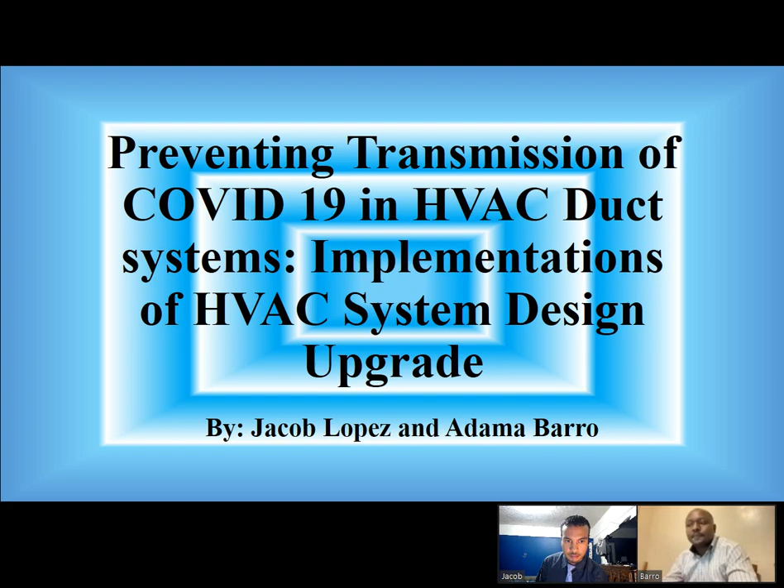Hello, everyone. As an introduction, as schools, government buildings, and commercial facilities of all sorts were shut down due to last year's COVID-19 pandemic, the urgency to focus on indoor air quality has been a priority to communities of all respects. In order for our research to be successful in finding a mitigation strategy for SARS-CoV-2 coronavirus, we first had to address the nature of how the virus may transmit through the air in public indoor spaces.

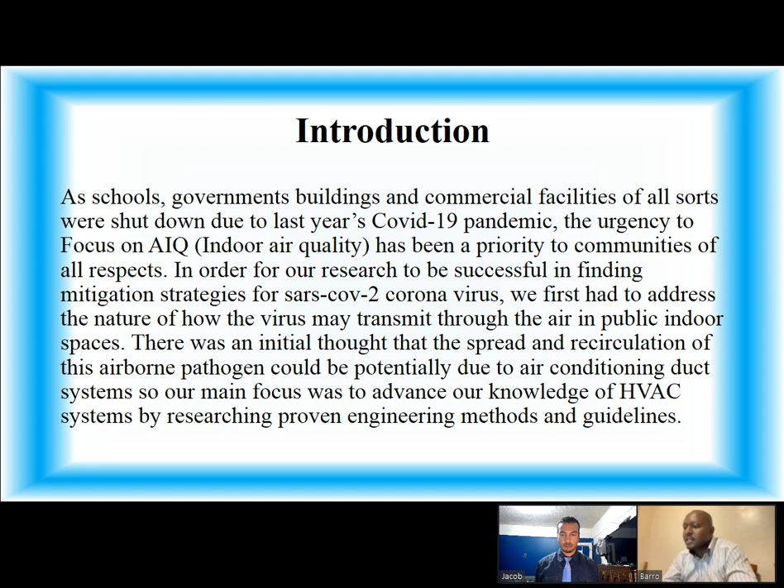There was an initial thought that the spread and circulation of this airborne pathogen could be potentially due to the air conditioning duct system. So our main focus was to advance our knowledge on HVAC systems by researching proven engineering methods and guidance. In our previous project, we researched how COVID-19 can possibly flow through the ambient air inside of restaurants, office spaces, and locomotive train cabins.

In a research article titled Evidence for Probable Aerosol Transmission of SARS-CoV-2 in a Poorly Ventilated Restaurant by corresponding author Kang, we learned that computational fluid dynamics simulation software was used to predict how viral particulates disperse and travel through the air.

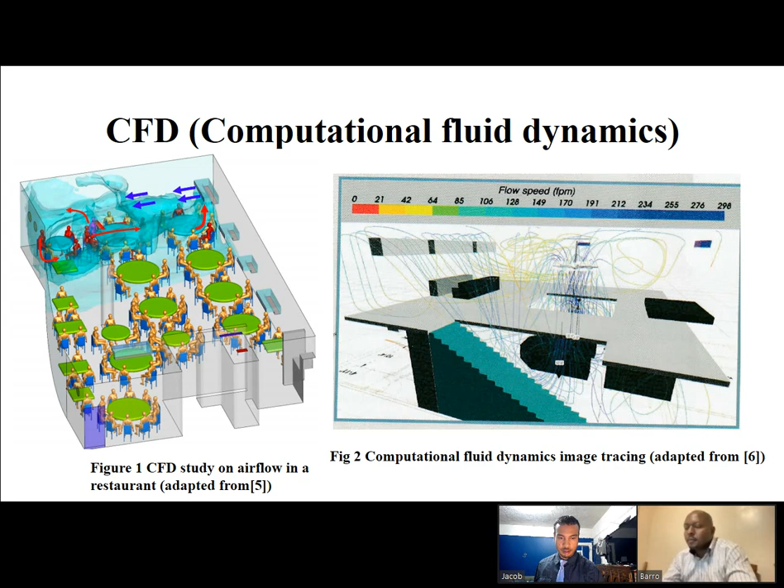Here is an image of computational fluid dynamics. Here, figure 1 shows the computational fluid dynamics study on airflow in a restaurant, and figure 2 shows computational fluid dynamics, which is basically tracing the image of the gases. Understanding of aerosol transmission of COVID-19 in indoor environments.

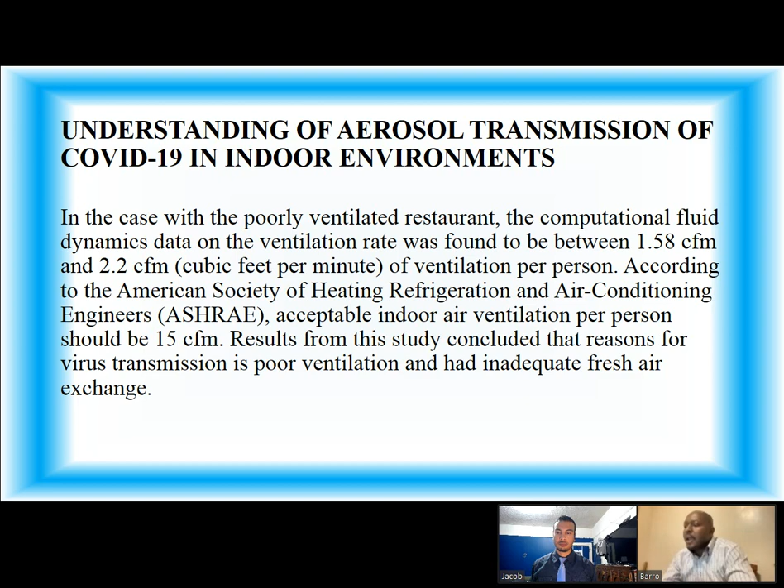In the case of the poorly ventilated restaurant, the computational fluid dynamics data on the ventilation rate was found to be between 1.58 CFM and 2.2 CFM of ventilation per person. According to ASHRAE, acceptable ventilation per person should be 15 CFM. Results from this study concluded that reasons for virus transmission were poor ventilation and inadequate fresh air exchange.

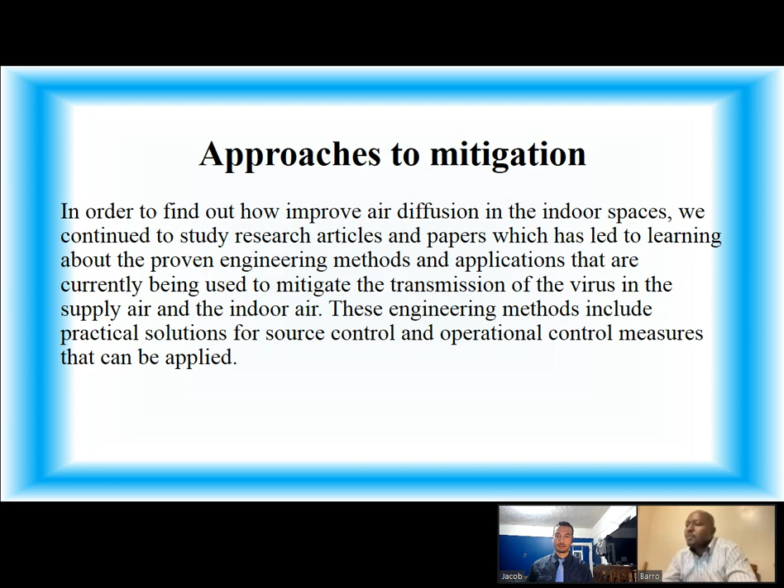Approaches to mitigation. In order to find out how to improve air diffusion in indoor spaces, we continued to study research articles and papers, which has led to learning about the proven engineering methods and applications that are currently being used to mitigate the transmission of the virus in the supply air and indoor air. These engineering methods include practical solutions for source control and operational control measures that can be applied.

In the research paper titled Ultraviolet Germicidal Irradiation Handbook, UVGI for Air and Surface Disinfection by Władysław Kowalski, it has been found that at wavelength 253.7 nanometers, which falls under the UVC spectrum, changes occur in the structure of DNA and RNA, which results in the inactivation of RNA viruses.

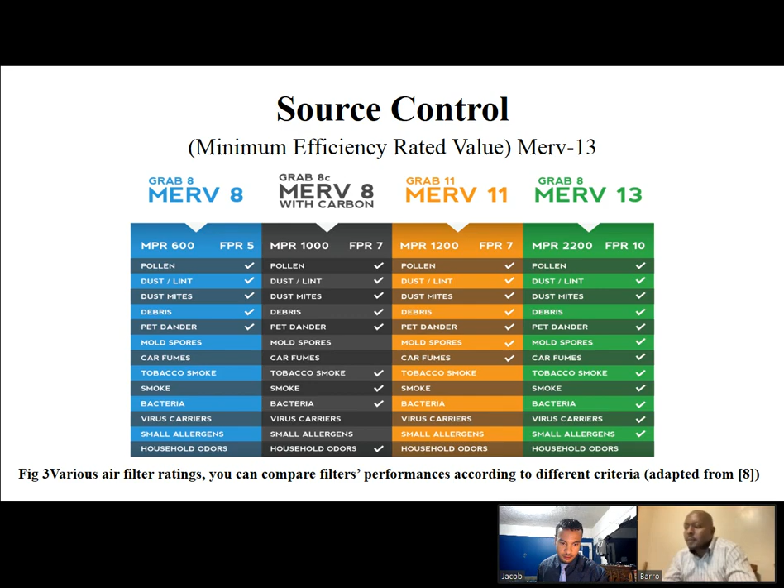Here is an image of various MERV rated filters. It's basically used as a source control. With various filter ratings, you can compare the filter's performance according to different criteria. And as you can see, MERV 13 can also filter virus carriers. Source control, minimum efficiency reporting value, MERV 13 filters.

According to research, the SARS-CoV-2 virus is 0.1 microns, but 1 micron or larger when trapped in a respiratory droplet nucleus. Higher rated MERV filters are more efficient in capturing small particles. Research suggests the MERV 13 filter is the least resistant to airflow, with 85% efficiency in capturing COVID-19 particulates in the 1 to 3 microns range. Here we have source control strategies.

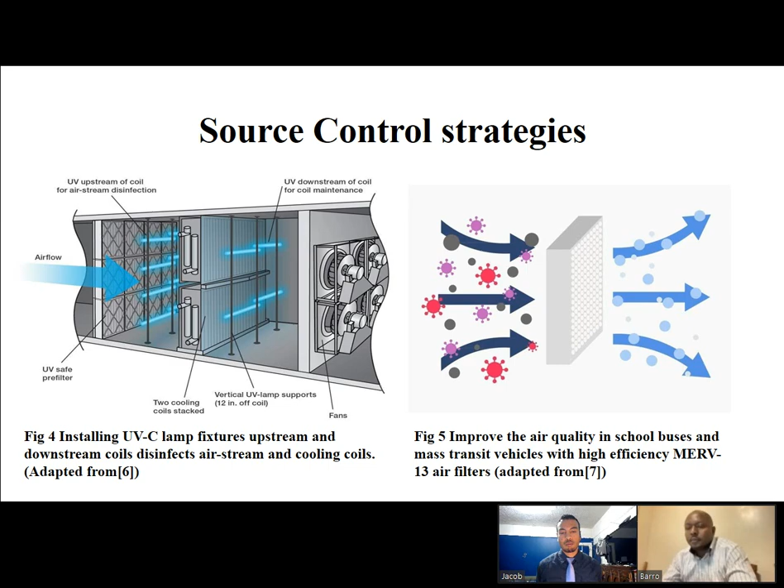Figure 4 shows the UVC lamp fixtures installed upstream and downstream of the cooling coils, which disinfect the airstreams and the cooling coils. And here we have figure 5, which shows the MERV 13 air filter, which can be used to improve the air quality of school buses and mass transit vehicles.

Engineering guidelines, source control. Research has shown that UVC germicidal irradiation lamps inactivate 99% of virus, and minimum efficiency reporting value MERV 13 rated filters were 85% efficient at capturing COVID-19 particles that range from 1 to 3 micrometers in size.

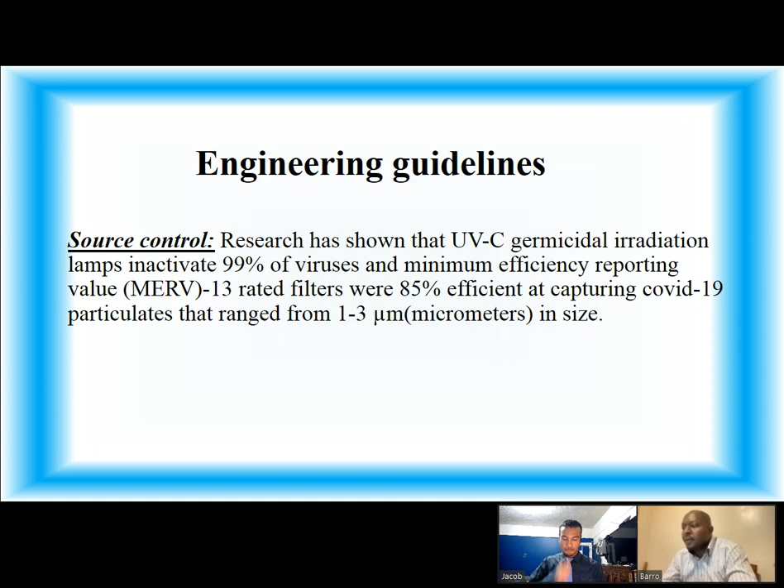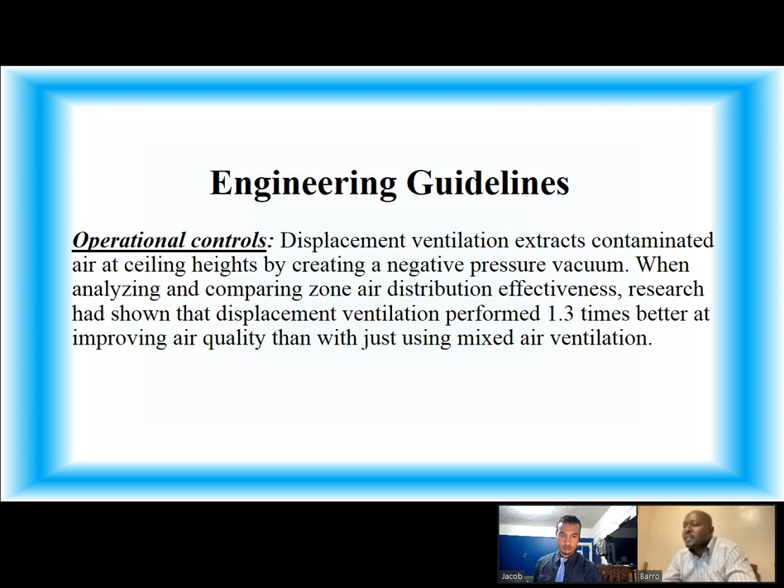Operational control: displacement ventilation extracts contaminated air at ceiling height by creating a negative pressure vacuum. When analyzing and comparing zone air distribution effectiveness, research has shown that displacement ventilation performs 1.3 times better at improving air quality than just using mixed air ventilation. Here's an image of ventilation displacement, which shows how the air moves in a classroom setting.

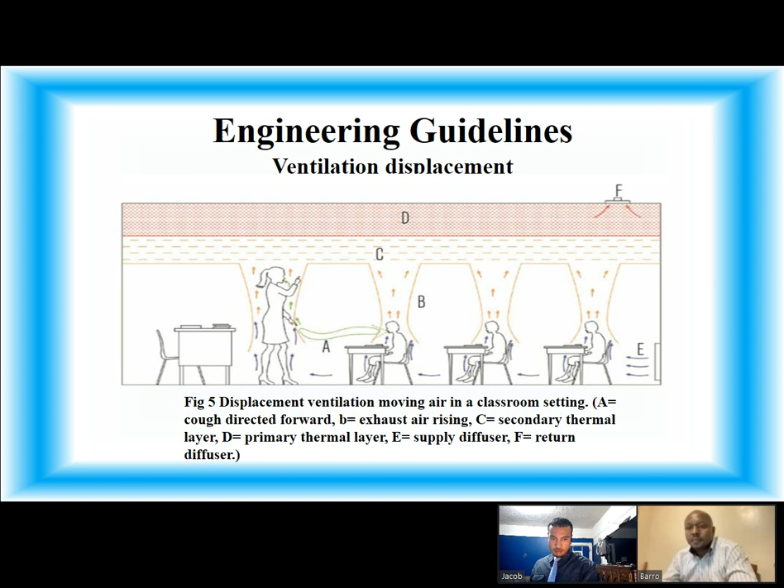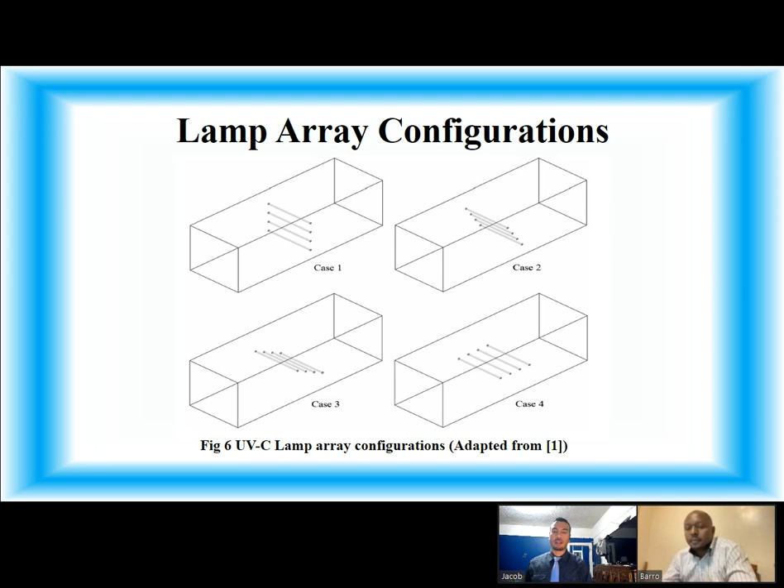UV lamp performance efficiency. As we continued our research project, we focused on assessing the effectiveness of in-duct ultraviolet UVC lamp irradiation and ideal installation arrays according to the latest research and mechanical engineering guidelines. Figure 6 shows the lamp array configurations.

Modeling methods. Computational fluid dynamics simulation tests have been used as one of the major tools for modeling the effectiveness of ultraviolet germicidal irradiation. In this research, the discrete ordinates method was used to model the irradiation field of UVGI systems. In order to test the best ultraviolet lamp array configuration, 4 identical UV lamps were distributed evenly in 4

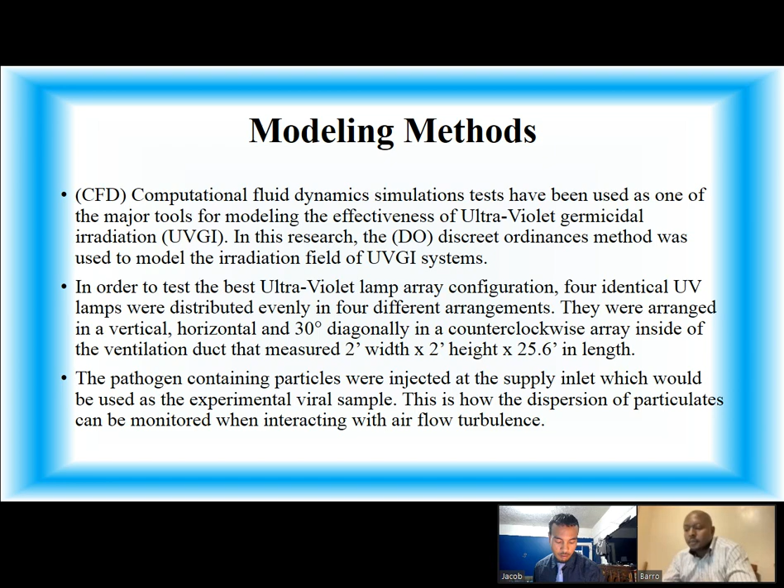different arrangements. They were arranged vertically, horizontally, and 30 degrees diagonally in a counterclockwise array inside of the ventilation duct that measured 2 feet wide, 2 feet high, and 25.6 feet in length. The pathogen-containing particles were injected at the supply inlet, which would be used as the experimental viral sample. This is how the dispersion of the particulates can be monitored when interacting with airflow turbulence. Figure 7 shows the UV radiation contour profiles at midplane for all cases.

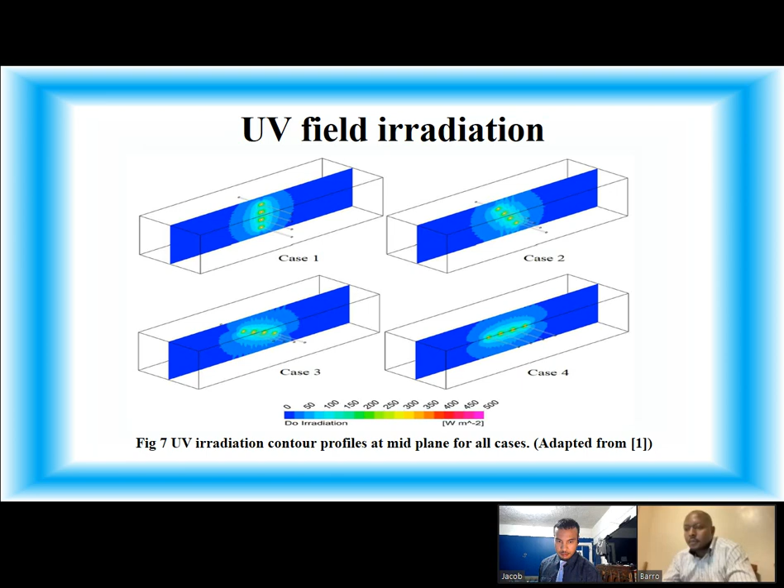UV lamp performance efficiency. It is important to note that lamp array position plays an important factor in UV performance. Different lamp array configurations have shown unique results for UV distribution doses. Case 1 clearly demonstrates the most even UVC dose distribution. Case 2 was similar to case 1 except the irradiation field was a bit smaller. In case 3, the lamp configuration shows a non-uniform irradiation distribution. And in case 4, the distribution is much narrower compared to the other lamp arrangements.

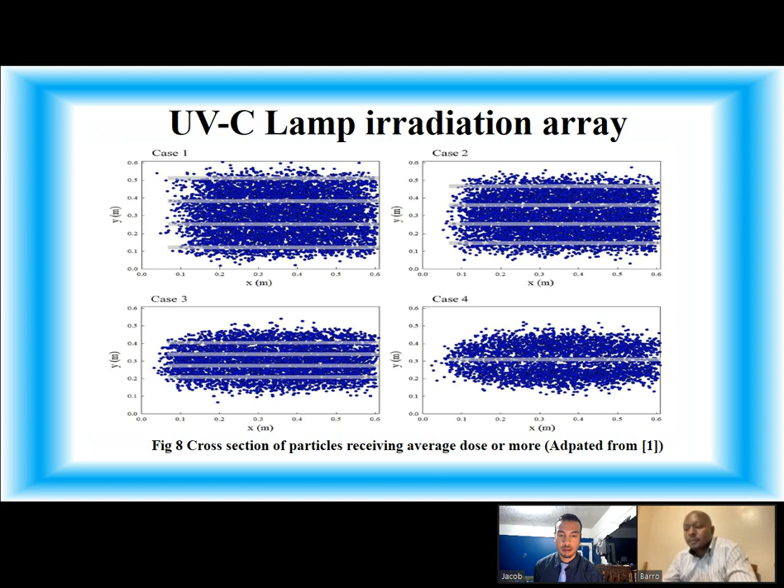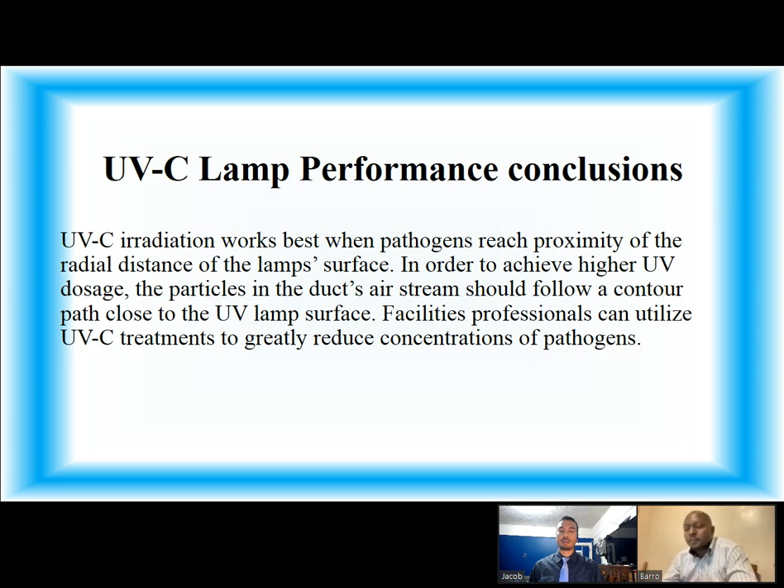UVC lamp performance conclusions. UVC irradiation works best when pathogens reach proximity of the radial distance of lamp surfaces. In order to achieve a higher UV dosage, the particles in the duct's airstream should follow a contour path close to the UV lamp surface. Facilities professionals can utilize UVC treatments to greatly reduce concentrations of pathogens.

Discussions. Upgrading filters to higher efficiency ratings can cause pressure drops in the duct, causing a decrease in airflow velocities. In order to make up for this pressure drop, fan speeds must increase, causing energy consumption to increase. In the HVAC industry, there are always concerns about energy savings as engineers implement methods to improve indoor air quality.

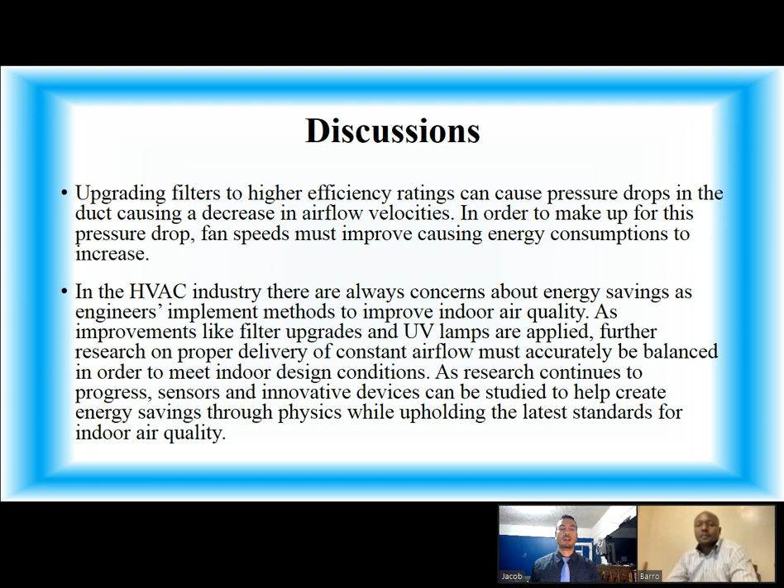As improvements like filter upgrades and UV lamps are applied, further research on proper delivery of constant airflow must be accurately balanced in order to meet indoor design conditions. As research continues to progress, sensors and innovative devices can be studied to help create energy savings through physics while upholding the latest standards for indoor air quality.